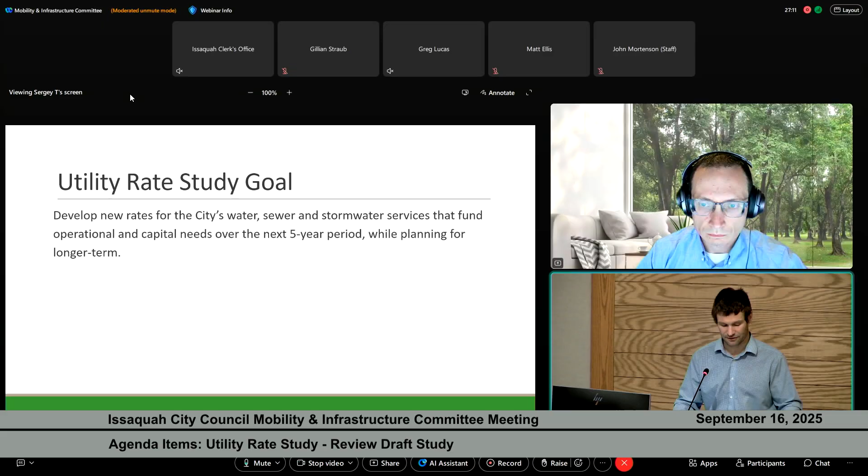Next slide. As we look at bringing the entire study to the full council, we want to reiterate the core objectives that we set out for the rate study way back in March when we began this endeavor. Namely, we want our rates to be predictable, smooth, and uniform; establish a defensible basis for assigning cost shares and providing equity for ratepayers; cover the full cost of providing utility services now and in the future; provide sufficient operating reserves to protect the solvency of our funds; and afford the investment in capital infrastructure to ensure current and future customers pay their share of the system's costs.

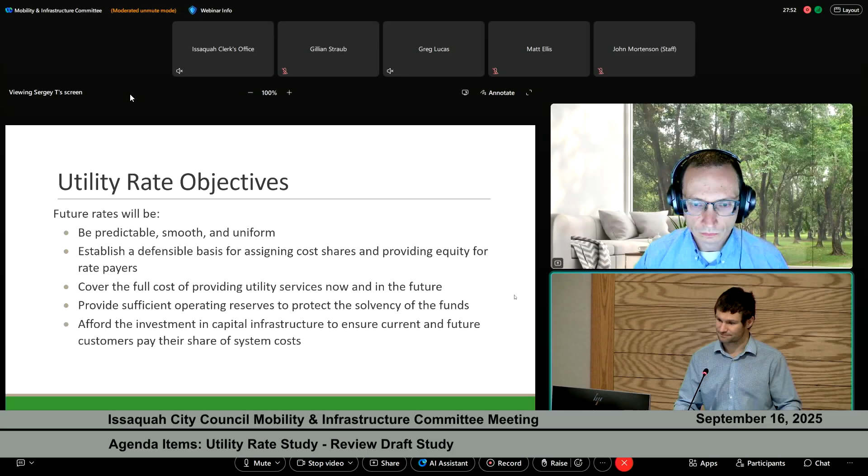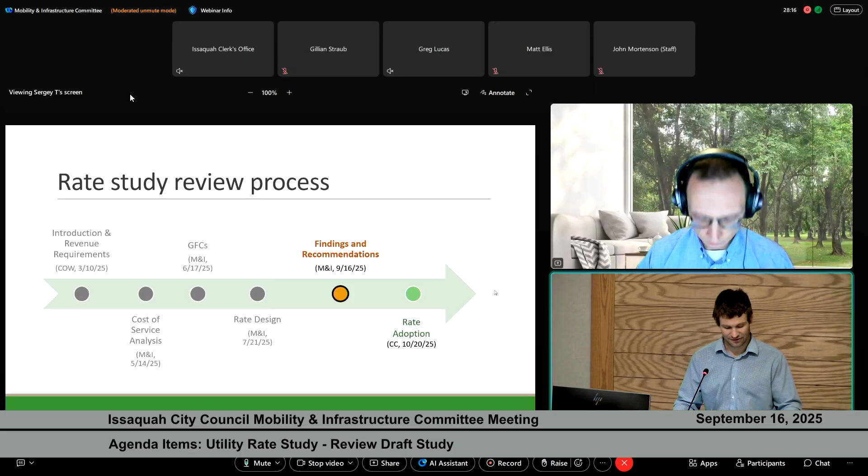Next slide. So here we are. We set our revenue requirements, our cost of service for each utility, identified general facility charges, and evaluated our rate design. Tonight we are going to provide a very brief summary of the policy discussions we made to date, as well as show the changes in utility rates from present to future, and ensure the committee is ready to send the entire package to council for rate adoption on October 20th. Next slide.

So, with that, our direction needed tonight is we'll be asking the committee if you are ready to forward the rate study to City Council for consideration and to recommend adoption. And with that, I'm going to pass it off to Sergey.

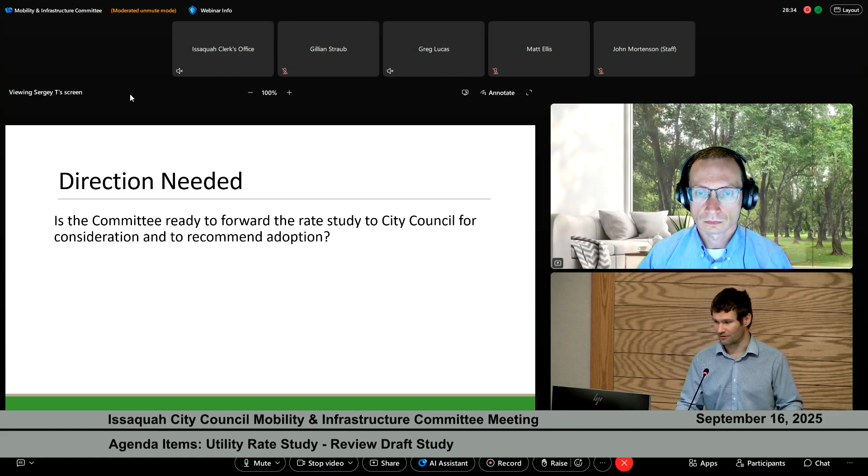Thank you, Matt, and thank you committee members for taking the time this afternoon to continue our discussion regarding the utility rate study for the water, sewer, and stormwater utilities. As Matt mentioned, my name is Sergey Tarasov with FCS. Now we'll do a quick overview of the presentation and dive right in. We're going to talk about the overall rate setting process. It's been a couple of months since we met, and I always like to reiterate just the steps that go into these types of analyses.

We'll talk about the background, just a quick refresher of our prior meetings, and dive into the summary of the prior discussions regarding policy and the guidance that we have received. We'll also briefly look at the results, but all the information that we'll be discussing today has been reviewed numerous times with the committee and staff internally, and is just being aggregated all together for your one additional review, just to make sure that you're comfortable with the guidance to move forward with the full council.

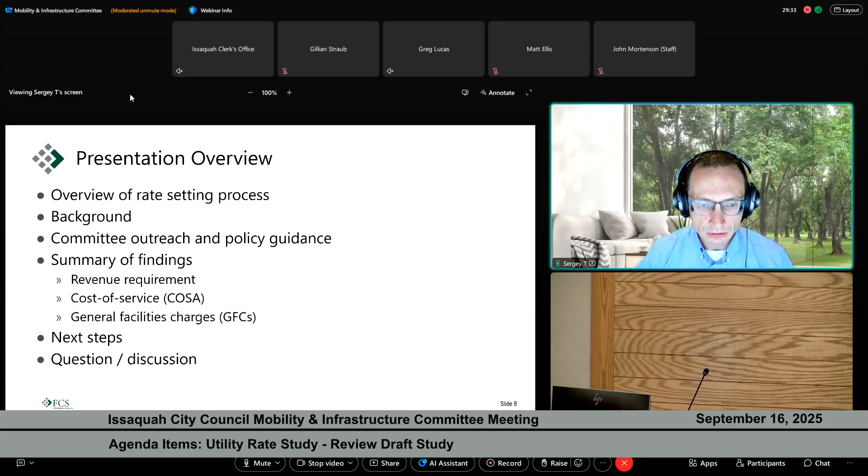So just as a reminder, a typical study such as this one consists of 3 key analytical steps, starting with the overall revenue requirement, which defines the needs for each utility on a standalone basis. Here we're taking a look at our expenses and revenues at current levels, making sure that we can meet our obligations, and if not, what do we need to do about it, making sure that each utility is self-sufficient, with no cross-utility subsidization occurring.

Step number 2 is referred to as cost of service, and dives a little bit deeper, looking at inter-class cost allocation, trying to answer the question if there are differences between classes. So if you think of step 1 as identifying the size of the cost, the size of the pie of cost that we need to cover, step 2 slices that pie into pieces to look at how big the slice should be for each class.

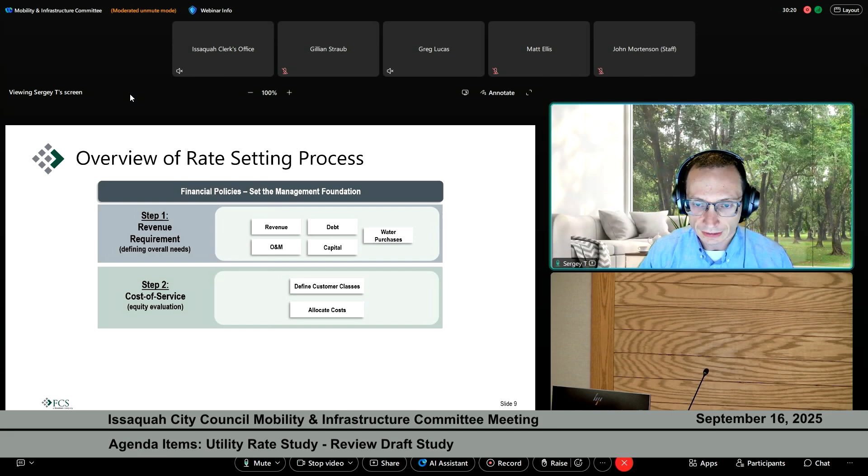And lastly, step number 3, rate design, looks at developing the actual fixed and variable charges that are assessed to our classes and our customers individually.

Now, as a quick background, the last study completed for the utilities, for the city's utilities, was in 2020. At that time, revenues were not sufficient to keep up with obligations, and the study developed a multi-year rate strategy for each utility, which is summarized in the table in the middle of the graphic. The highlighted green years are the years that have been adopted and implemented, and the study also forecasted beyond that 4-year period to see if there will be a need for additional adjustments.

Before implementing any extra rates, 2026 and beyond, the city wanted to revisit it, and that's why we're here this year discussing that updated rate study, which started in 2024.

Now, since we started the study, we've been working with your staff, going over the details, developing the analysis, and started the outreach and communication process with the committee of the whole earlier this year in March, and then continued our discussion with the Mobility and Infrastructure Committee, meeting to follow up on revenue requirements, talking about cost of service, discussing the one-time fees imposed on new development or redevelopment through general facility charges, and then our last discussion was in July to talk about rate design.

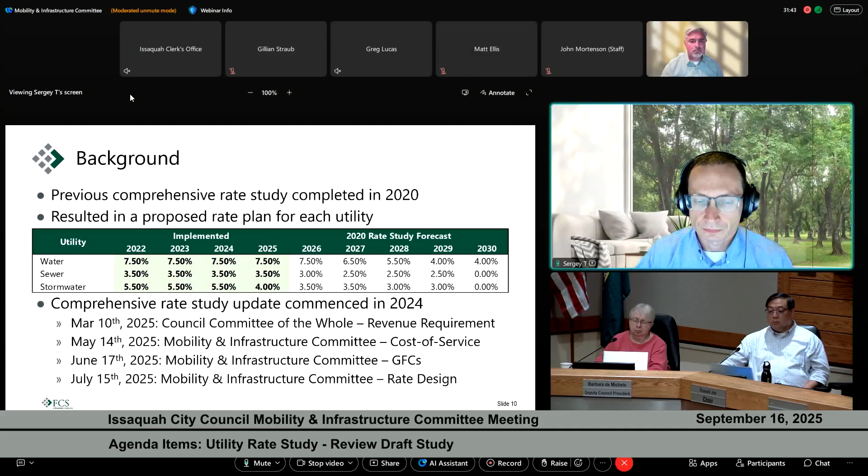Now, the major policy guidance that we were looking for from the committee, and received from the committee, will be summarized in the next couple of slides, and we'll again break it down by the steps of the rate study.

Starting with the revenue requirement, again, we did confirm that the projections from the prior study were present. Rates at current levels in 2025 dollars were not sufficient to keep up with the inflationary cost pressures on operating costs, as well as the capital plans identified in the planning process through water system planning and general sewer planning.

In order to resolve those deficiencies, we came up with multiple approaches, and we looked for guidance from the committee, focusing on the way that we're financing our capital plan. So the first major question and guidance we received was, how do we pay for our capital? Do we utilize cash-only financing? Do we maximize debt financing? Or look at a hybrid approach?

Based on a bit of discussion that we had with the committee of the whole and the follow-up discussion, the direction we received was that we should try to minimize debt, especially in the short term, as much as possible. But if we have to utilize some debt in the longer term to keep our rates as affordable as possible, that was sufficient as well. So our main guidance was to keep the debt borrowing to a minimum if possible.

The second question that we had for council was regarding multi-year rate setting. The rate strategy that we'll be discussing and the rate plan will be a 5-year rate plan. The capital needs that the utilities are facing, developed through the comprehensive planning efforts, do go beyond that 5-year strategy. So the big question was, do we set our rates for just our short-term needs, or do we make sure that we can cover our obligations not just today but into the future?

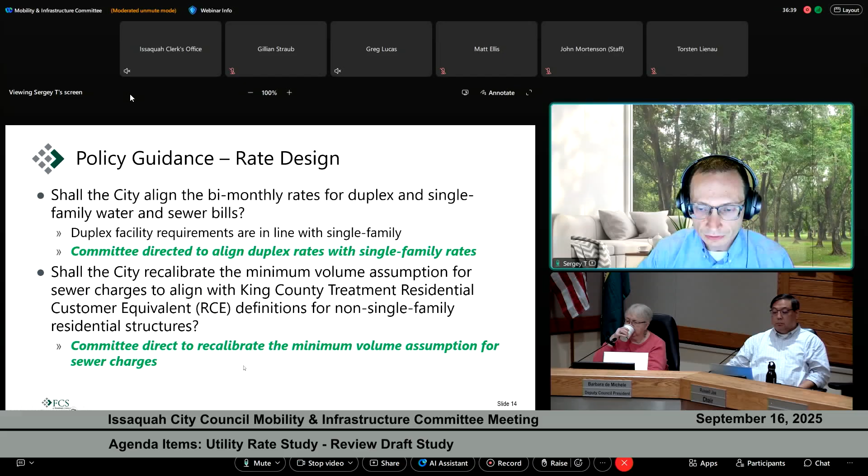So we proposed recalibrating to tie the minimum charges to align with their definition of an RCE. Again, the committee was comfortable with that recommendation.

Then the last policy guidance we talked about was focused around a slightly different concept. Previously, we were talking about bi-monthly rates, which are ongoing to existing customers. Then we switched gears and talked about general facility charges, which are one-time fees imposed on development for connecting to the city's utilities. When we calculated the charges to cost-based levels, the question for the committee was: do we set the rates at the calculated levels? Do we defer any adjustments at this time and revisit in the future, keeping rates at current levels, which would put pressure onto existing customers for the recovery of those project costs?

Do we phase in gradually towards cost-based levels over multiple years? And then lastly, historically the city has had a practice of adjusting these fees between these interim updates with inflation, because these charges are typically calculated in today's dollars, and as the cost of infrastructure increases, you're allowed to adjust the fees to account for that inflation.

So the direction we received from the committee based on these charges was to set the sewer and storm charges to the cost-based levels, and gradually phase in the water adjustments over time, since they were a bit higher than the other utilities from an increase perspective. Regarding the annual inflation, the committee was comfortable keeping the current practice of adjusting for inflation annually.

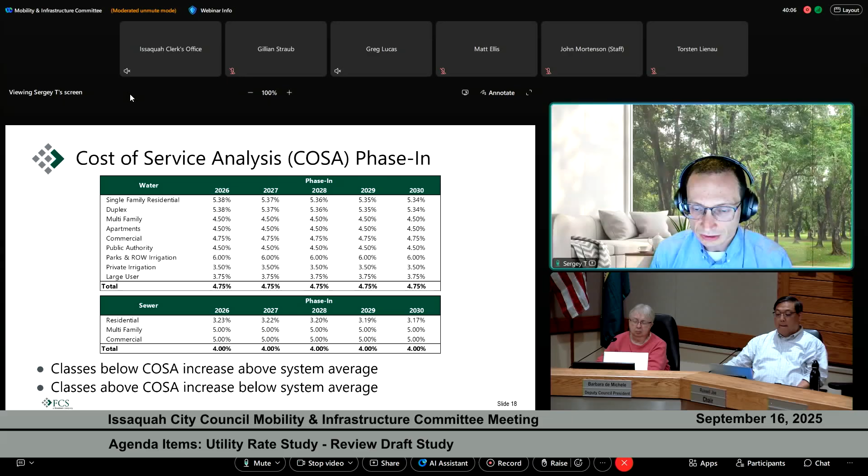Next, we'll take a look at the last step, the rate design, the actual proposed rate schedules. Again, not focusing too much on the numbers, because there's quite a few. I do apologize for that. This is the rate proposed schedule for the single family and the duplex rate schedules.

The main thing to notice here is that currently the single family and duplex rates are slightly different, both on the fixed charges, represented in the upper table, and they have a slightly varying volumetric rate represented in the bottom table. The blocks are slightly different, and the rates within those blocks are different. All we're trying to propose is to move the duplex into the single family structure, with this change starting in 2026.

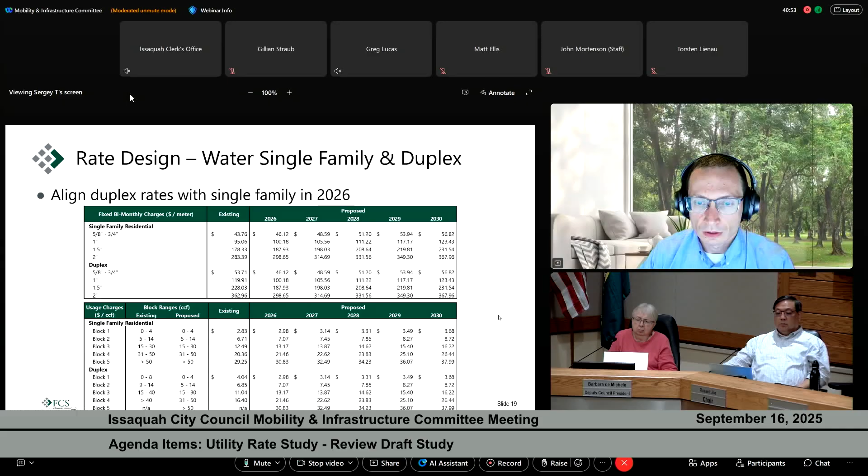Moving on to non-residential classes, here we currently have the same fixed charge for all non-single family type of accounts, which includes apartments, commercial classes, public authority, and large user accounts. We're keeping that concept the same. Everybody will still maintain the same fixed charge on a bi-monthly basis.

The volumetric rates will be slightly adjusted differently to align with the cost of service phase-in that we talked about a couple of slides ago. Overall, not a significant change from a system-wide adjustment, just keeping the same rates for the fixed portion and slight moderate adjustments to each individual subclass of the non-residential categories.

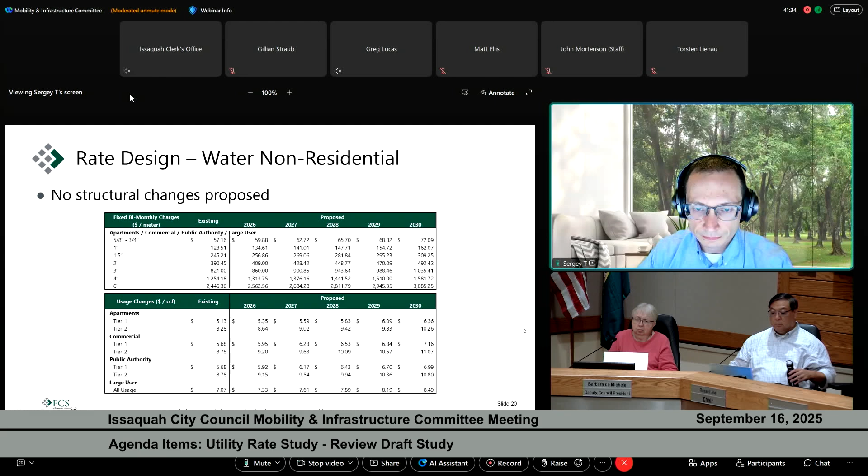For the irrigation classes, here we're summarizing both parks and right-of-way irrigation as well as private irrigation. Again, similar concept here. The bi-monthly fixed charges will remain the same for both, and the volumetric rates will start to converge gradually over many years. So this is a very gradual transition, moving the classes towards a similar rate as identified in the cost of service analysis.

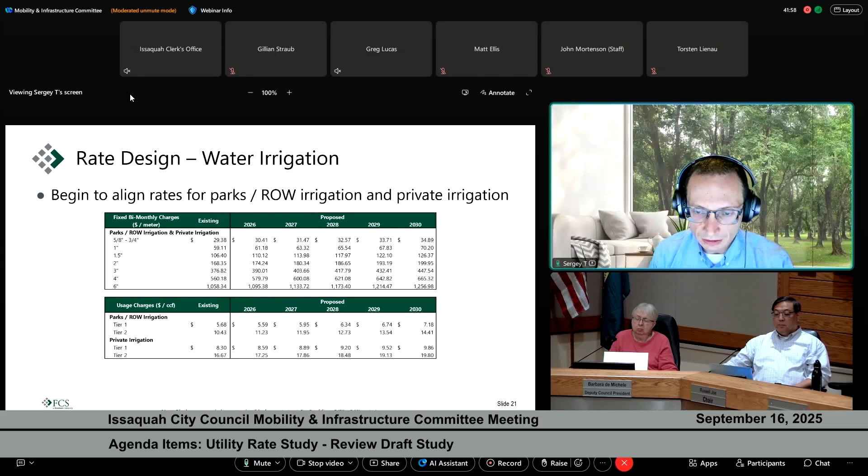Moving on to the sewer utility, here we're summarizing the local share, the city share of charges. We currently have a fixed charge that's the same no matter what class of service we have, and a volumetric charge which is also the same no matter what class we have. Based on the cost of service results, there needs to be a differential between classes.

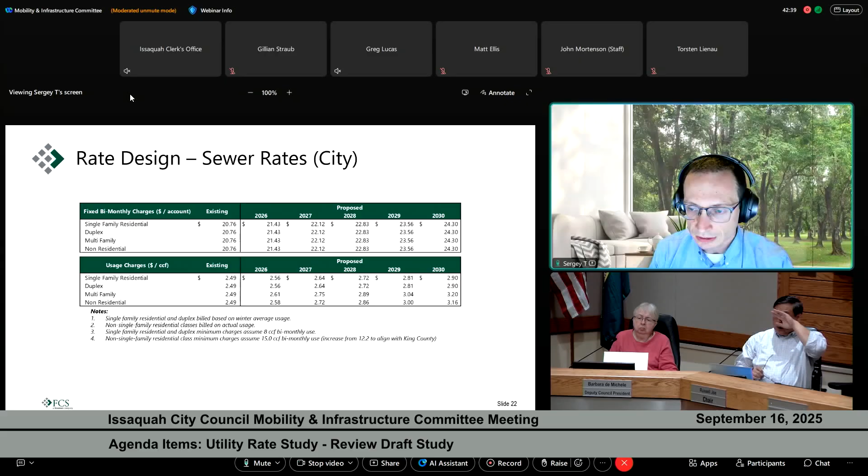Now we're keeping the fixed charge the same for all classes, but the differential is starting to materialize through the volumetric rate. So you'll notice the single family and duplex rates will stay together because we're merging those classes into one, and the multifamily and non-residential classes will start to deviate in 2026 and beyond, trying to align and address the cost of service findings.

Looking at the combined rate for the city and the King County portions of the sewer rate, the upper table shows us the fixed charges. You will notice that the single family rate consists of both the local share and the fixed charge for the King County treatment portion, because it is assessed by King County to us on a fixed charge basis.

So you can see that it's represented as a much higher rate than only the local share for all other classes. Starting in '26, you'll notice duplex will align exactly to the single family rate, while the multifamily and non-residential will still continue to only have that local share.

For the volumetric rate, the single family rate only has the local share, while the duplex and non-single family have a built-in volumetric King County portion as well. That concept again goes to merging duplex with single family starting in '26, and then keeping that same concept for the volumetric rates starting in '26 and thereafter.

You will notice the minimum charges that are assessed to our non-single family customers will go up slightly. That is because we are rebalancing that minimum fee to align with the King County definition of RCE. So instead of being about 12.2, which it currently is, we are moving to the RCE definition for the minimum bill of 1,500 cubic feet or 15 CCF bi-monthly.

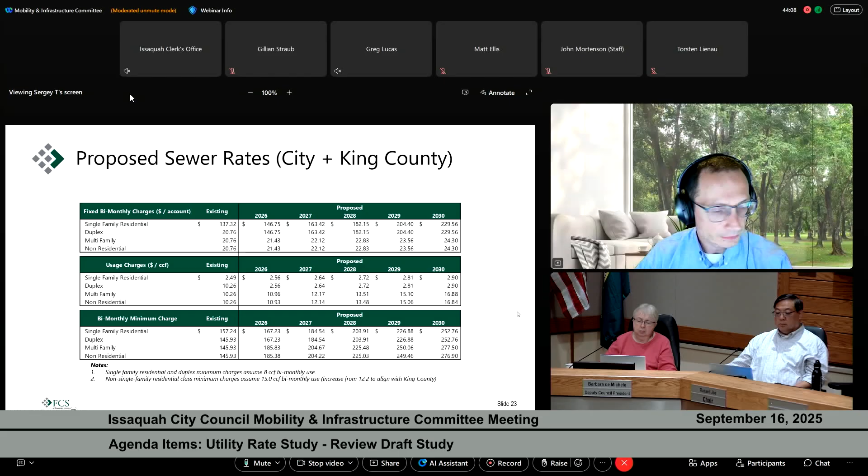Then lastly, we have our stormwater rates. These are assessed on an equivalent service unit basis. There is a lower rate for undeveloped parcels, but everybody's treated equally. It's just a charge per ESU, so there's no structural changes recommended. The increases are simply applied across the board to the per ESU rate.

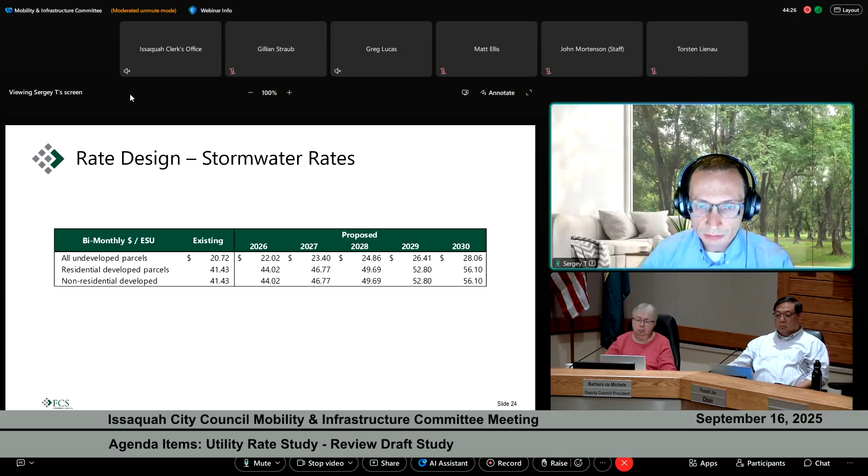Now, I always caution that this is a little bit of an apples and oranges comparison because we're comparing our rates today to the proposed rates for tomorrow with everybody's rates today. And we know for a fact that many of these communities are going through similar type of studies and will have similar types of adjustments proposed for their 2026 year as well. In addition, every system's different, every system's topography is different, demographics are different, so it's just not a perfect apples and apples comparison, but that question does get asked.

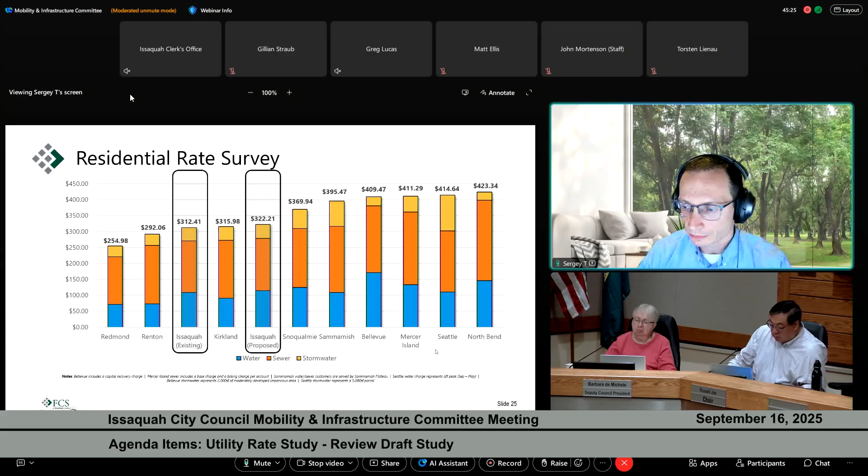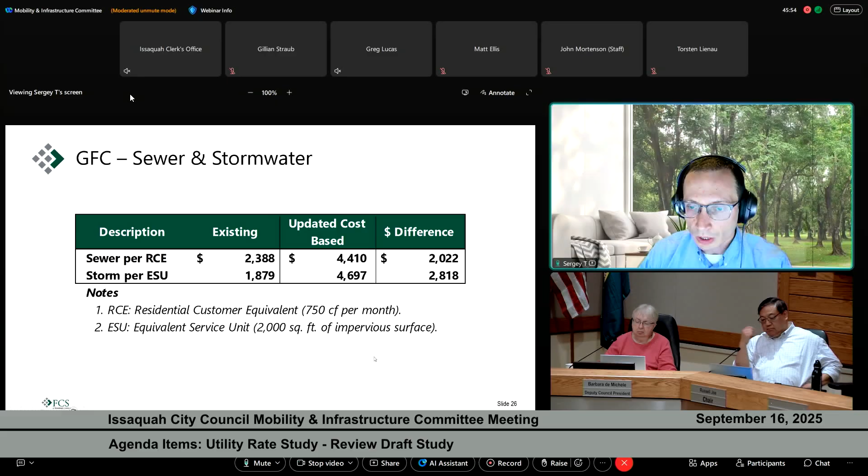In addition to the charges that you're seeing here, inflation will be adjusted based on an accredited construction cost inflation index, which typically is referenced as the engineering news record construction cost inflation index. Since we don't know what the inflation will be and it has to be tied to actual inflation, the adjustments will have to occur once the indices are published on an annual basis.

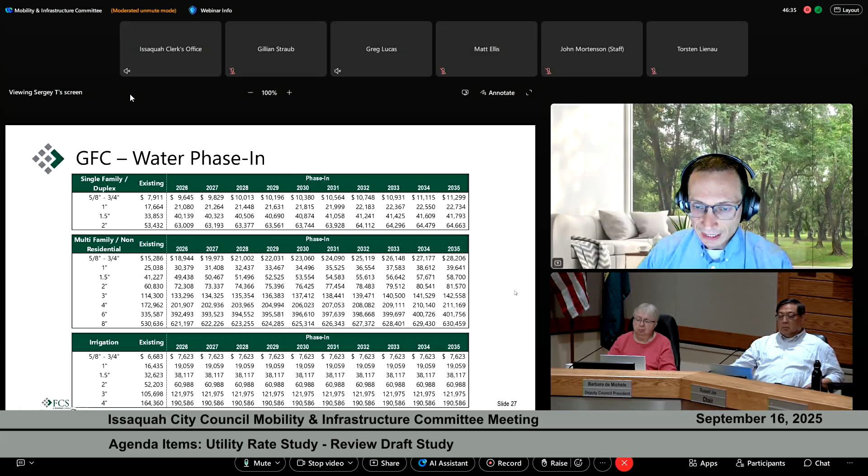So with that brings to the end my portion of the presentation, and I'll hand it back over to Matt.

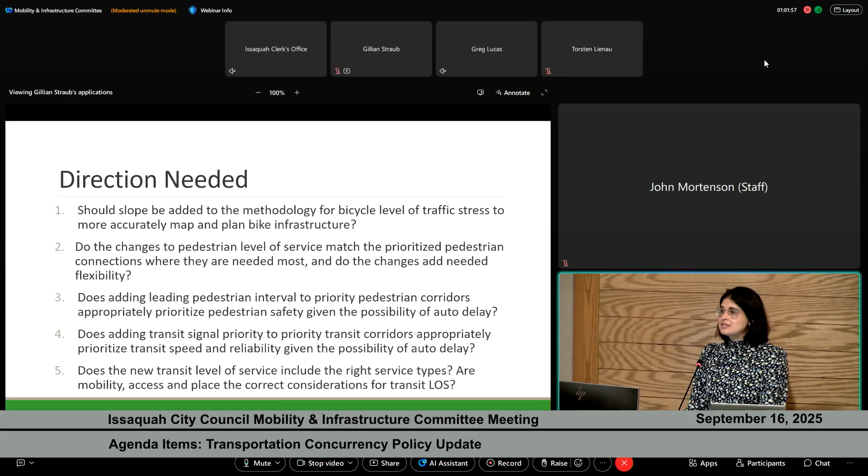Our recommendation — we'll go through exactly what that is for each of these — is that you support these changes and recommend them for adoption by the City Council in November. This is because they enhance our ability to build stronger, safer, and more reliable multimodal connections throughout the city.

We brought these items to the Transportation Advisory Board 4 times over the last year. Their fingerprints are all over this work, and they've really enhanced what we're proposing to you tonight. They supported these changes, both the large policy changes and how they're incorporated in our transportation element and mobility action plan. We brought these same items to PPC, and they were also supportive, but we can get into more nuance of that feedback as needed when we talk about each item.

You've probably heard about concurrency not just as it relates to this project, so we wanted to give you a sense of other touch points with the concurrency process you've had, and some next steps for this larger body of work.

In 2023, we conducted a concurrency model update that assesses demand at different intersections for different modes, but largely assesses vehicular demand, both now and into the future. We're supposed to do that every 3 to 5 years by code, so you'll see it on our next steps list to pursue an update to that model in the next 3 or so years.

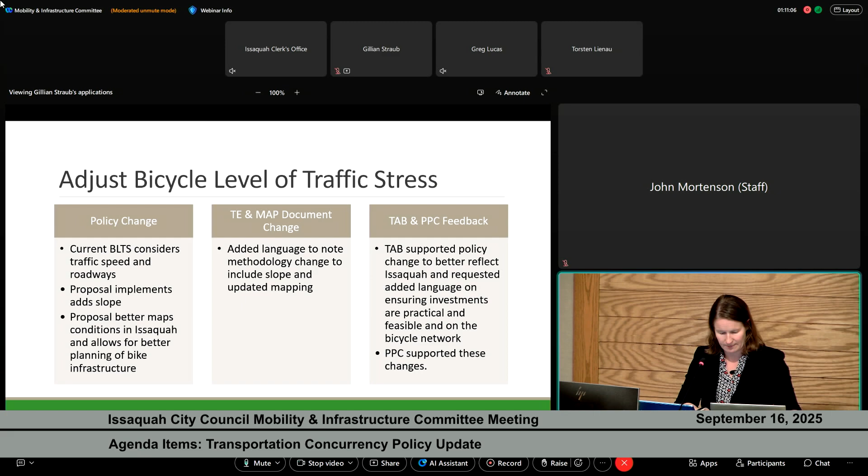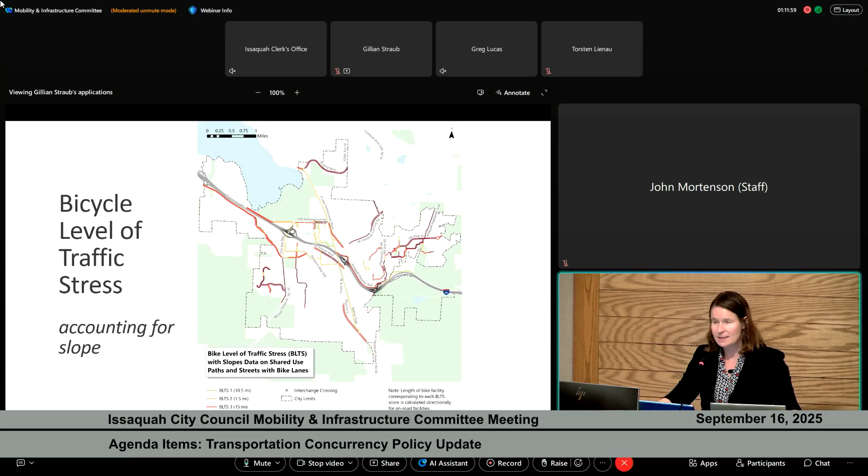I would note that there are many low-speed, low-volume residential streets throughout the city. Those are an important, kind of informal component of our bike network, but this updated analysis might help us to think a little differently about our bike network moving forward.

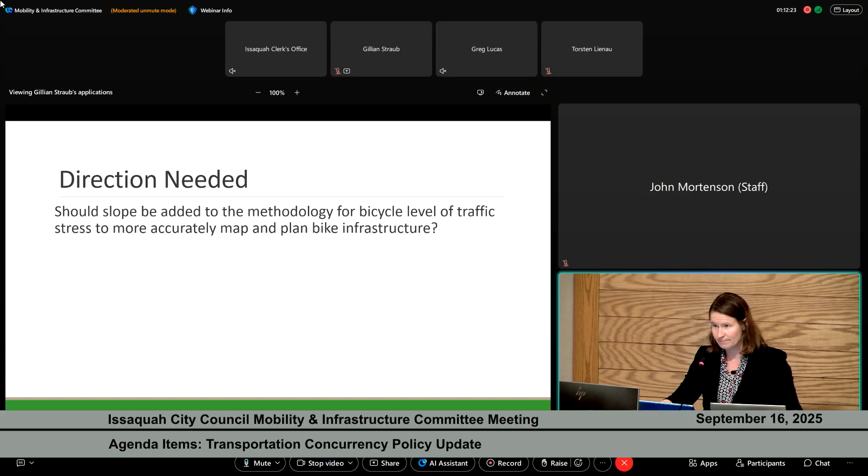So the direction we are looking for tonight from you is just to answer the question: should slope be added to the methodology for bicycle level of traffic stress to more accurately map and plan bicycle infrastructure? Do you have any questions about that?

I guess this is a new concept to us, so please forgive us if we're asking questions that are too basic. Does the bicycle level of traffic stress go into the calculation for the impact fees that developers potentially will pay? In other words, it's a measure of how good or stressful our roads are for bicyclists. It's a new measure that I think captures things, but how will it be used? Is it used to improve our infrastructure, or just to measure the stress of our infrastructure to bicyclists? That's an excellent question.

So it doesn't directly factor into an impact fee calculation. We're not going to be asking developers to look at the level of stress on a given bike facility. That's a pretty technical calculation, and that's why the city is doing that measurement up front.

What this is going to help the city do is update your capital list. That's one of the key components moving towards updating your impact fee program. First, you've got to get all the projects right. This analysis is intended to help you better plan your bike infrastructure and figure out which facilities are really worth the investment, and which ones might be too steep, where we need to think about something else. Once you have that capital list defined in your plans, you can go about updating your impact fee program. There's been a movement statewide toward more multimodal programs, and a recommendation I've discussed with your staff is updating that program to incorporate some of those key facilities. That's more and more prevalent all over the state today.

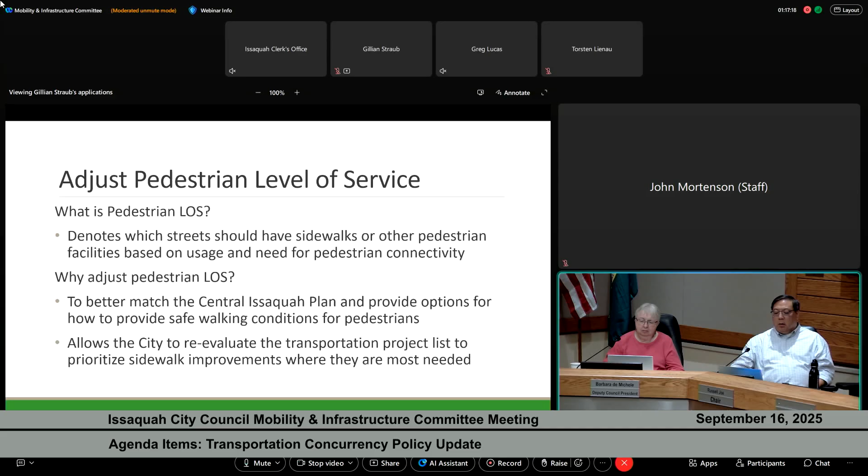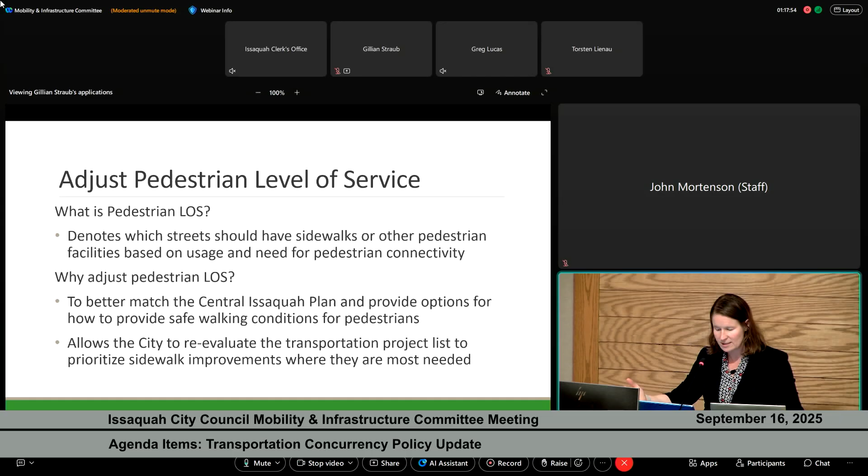Thank you, go ahead and keep going. Wonderful, thank you. So the next mode I'm going to talk about is pedestrian level of service. First, to describe the recommended adjustments to the city's pedestrian level of service standard: this policy helps guide which streets should have sidewalks based on expected usage, pedestrian activity, and connectivity. The recommended adjustments provide a better match to the central Issaquah plan and additional options for how to provide safe walking conditions. These updates will help the city reevaluate the project list to prioritize sidewalk improvements where they're needed most.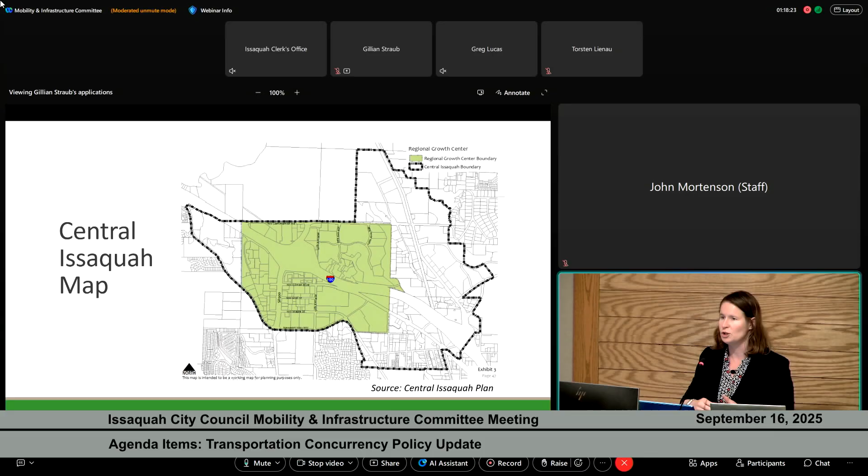We're recognizing that really all of central Issaquah should be in that equation. So that's one of the major changes in this new policy.

So when we look at what's being recommended here, there are big changes to expand Tier 1 requirements. Again, those are where you've got high amenity sidewalks on both sides of the street, on arterials and collectors throughout central Issaquah, not just limited to the Regional Growth Center.

It also provides some additional flexibility in how we think about accommodating pedestrians on residential roadways. Before, we said you've got to have speed limits of 20 miles or less, but the city engineer really called it out and TAB agreed: if there's a sidewalk on at least one side of the street, that should count too for meeting that standard.

So again, providing some additional flexibility and refinements to the policy we're looking at here. The proposal is really to add these wording changes to policy D1 to reflect that.

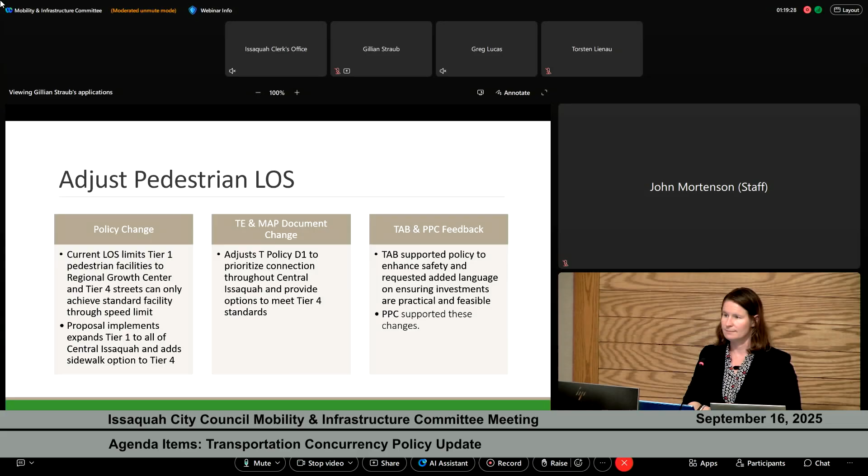Question: I'm a little inexperienced on this, but just to get the direction here, do the changes to the pedestrian level of service match the prioritized pedestrian connections where they're needed most, and do you agree with the changes to add needed flexibility?

Do you have any questions on this section? Okay.

In my discussions with citizens in town, they see all the growth and new construction going on, and they ask me what the city is doing to improve their mobility within the city. We touched on bikes a little bit with the measure you presented to us. How does this help our pedestrians get around more safely and more easily in town when I get asked that question?

I'll start with answering it, and I know John Mortenson is on and I'm sure he's excited to contribute. My quick response: the level of service policies can seem a little abstract, but where the rubber really hits the road is in helping refine your project list. This does a better job of reflecting that we need to provide higher pedestrian amenity throughout central Issaquah, where we're seeing a lot of the growth. So it's adding it to requirements, to your frontage requirements when a developer comes in. And eventually, when we get to impact fees, this helps these projects be part of that list. I see John Mortenson has lit up his camera, if you'd like to give some comment.

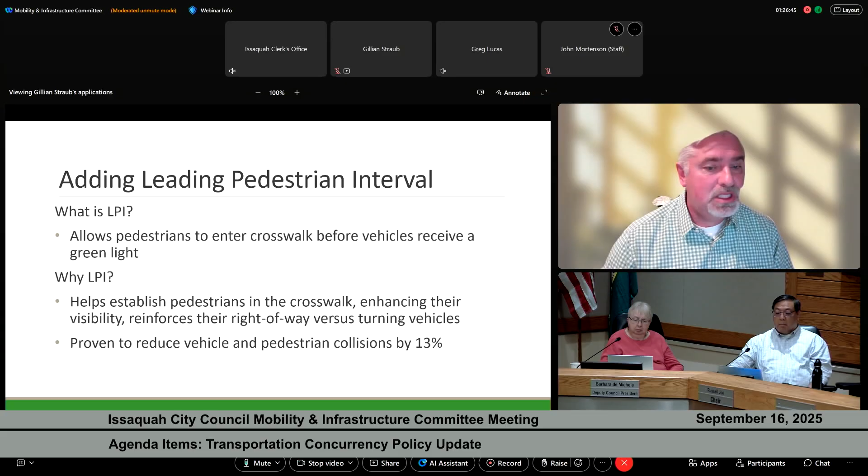Is someone able to advance to the next slide? Great.

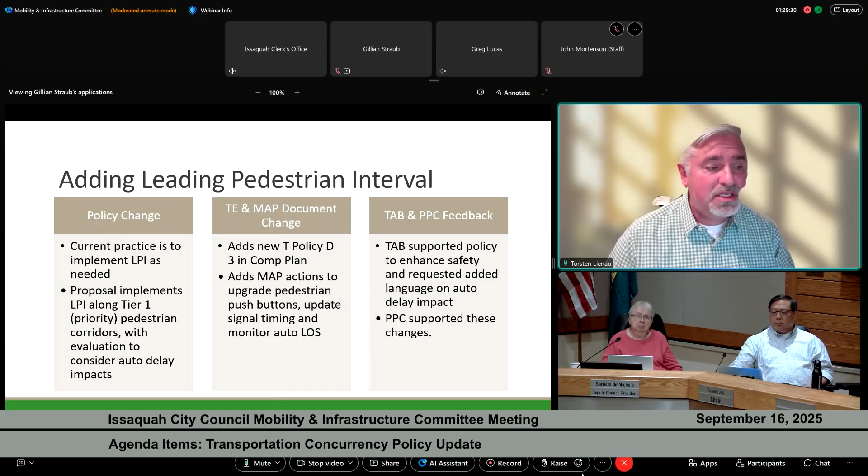Staff is recommending implementing LPI along all Tier 1 pedestrian corridors, while also monitoring and evaluating vehicular delay as it's implemented to ensure the city maintains its level of service standards. This entails a change to a MAP policy and a comprehensive plan policy, with actions to upgrade pedestrian push buttons at all intersections where this is implemented, update signal timing, and continue to monitor automobile level of service at those intersections. Both TAB and PPC supported this recommendation. If we could go to the next slide, we are asking for your direction tonight.

We are asking for your direction tonight: does adding LPI to priority pedestrian corridors appropriately prioritize pedestrian safety with the possibility of some additional auto delay?

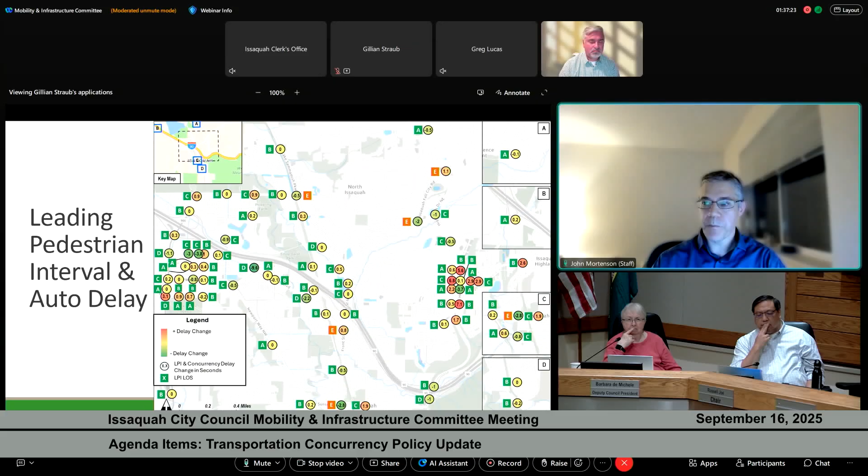And John, you said you've looked at pedestrian scramble at this particular intersection? Yeah, the city did a study back in 2018 that evaluated what would happen if that intersection was converted to a scramble, similar to what we have at the Three Trails crossing at Gilman, Juniper, and Rainier. It greatly increased the delay at that intersection and made it a lot worse for the automobile.

And that's generally the case, because if the intersection is already at capacity, you're creating a whole other phase at the intersection where no vehicles can move at all. Whereas with traditional pedestrian crossings, there are at least some vehicles moving that aren't in conflict with the pedestrians, and that helps with the delay. So it generally makes sense.

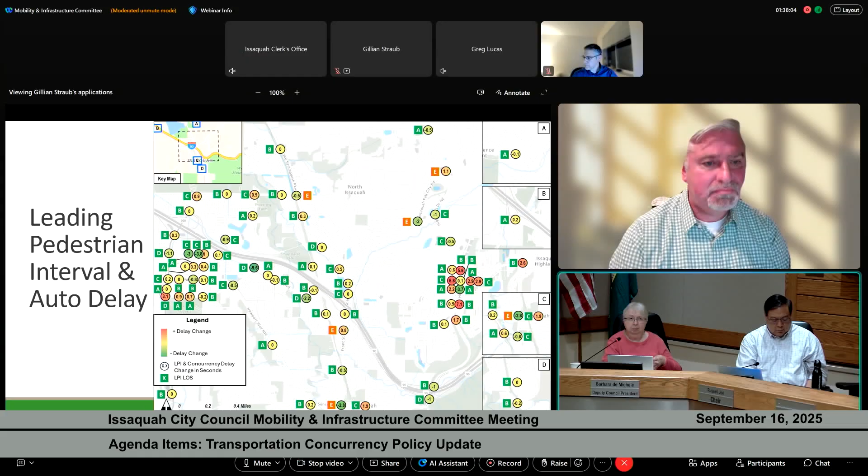Okay, thank you. All right, go ahead and keep on keeping on, so to speak.

So the next policy is transit signal priority. Essentially, transit signal priority senses a transit vehicle approaching an intersection, and without significant undue delay, the signal would potentially extend the green phase as the bus approaches so it can get through and clear the intersection. Or if a bus is approaching during a red light, the signal would sense the bus and might cut the other phases short and turn the phase to green, so the bus never ends up slowing down or stopping and continues through the intersection.

What it does, and why we would consider it, is it aids in the speed and reliability of transit, which are key factors in actually increasing ridership for transit. Thank you, for the next slide.

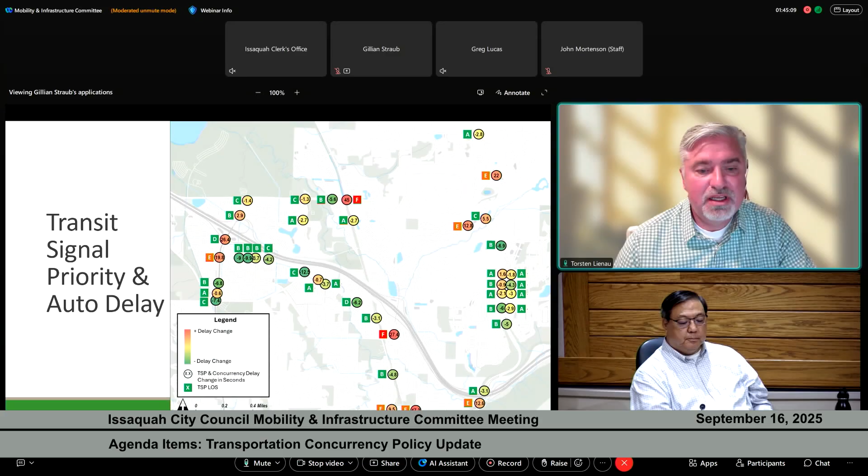You bet. Because we're looking at the other direction as well, so that average is considering TSP now operating in the northbound direction as well. And we did not assume queue jumps at Gilman and SR 900. That's the level of service E intersection.

So when you include queue jumps, generally that helps to mitigate the impacts of TSP. And since the road is already pretty wide there, and that would increase the pedestrian crossing distance as well, we did not look at queue jumps at that particular intersection or in the northbound direction at the I-90 ramps.

Okay, and I guess the next question would be directed to John a little bit. The road is already pretty wide with the separate southbound transit lane dedicated off of eastbound 90 to southbound 900, and then on the other side there's a dedicated carpool lane there. So if we were to implement a TSP, it seems that the road is already pretty wide. Could we take a look at that intersection a little bit more closely to see if including a queue jump with TSP might improve times a little bit, or degrade times a little bit less than what we're seeing here? Or John, you might have already done that, so I'll just throw it over to you.

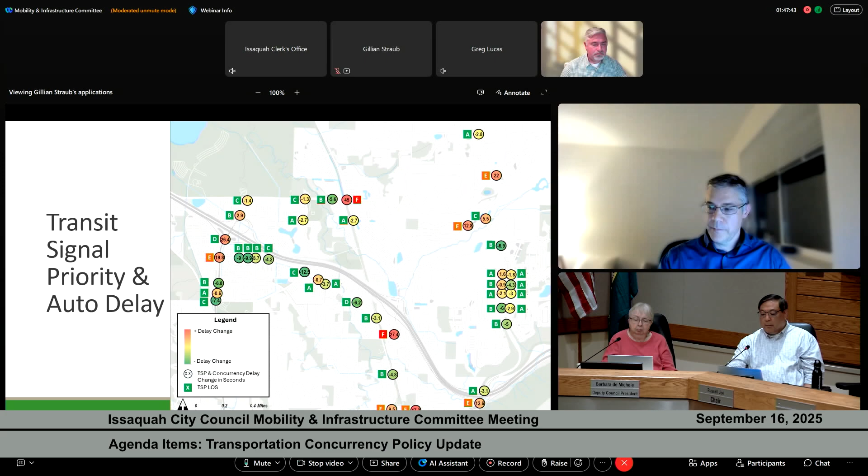Okay, appreciate that background. Thank you. Go ahead then with the presentation if there are no other questions from the committee.

I just wanted to interrupt briefly to point out two things. First, the possibility to add queue jump lanes is written into the mobility action plan as something we're going to look at to make sure we're considering auto delay, noting that as one of the tools. Second, I want to point out that TAB spent a lot of time talking with us about how we came up with this map and some of the assumptions that were made.

We were perhaps overly cautious in how much we anticipated auto delay on this map. I can't give you an exact recalibration to say those intersections we were looking at are actually probably level of service D rather than E. But when we talked through all the different factors that we had included, there was a sense from TAB that we were overly cautious and overly anticipated the possibility of auto delay.

But like Torsten and John have mentioned, we're going to take a look at those specific intersections where we could implement it to see when, in reality, what the impact might be. I just wanted to point that out before we moved on. No, it's helpful, thank you.

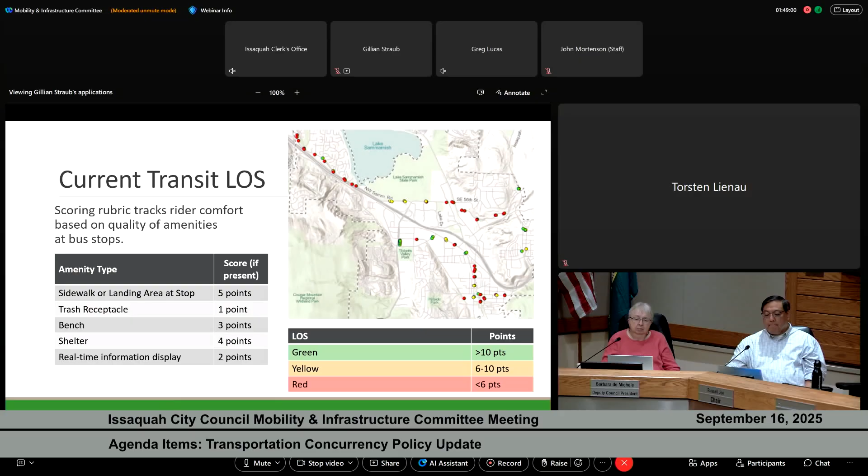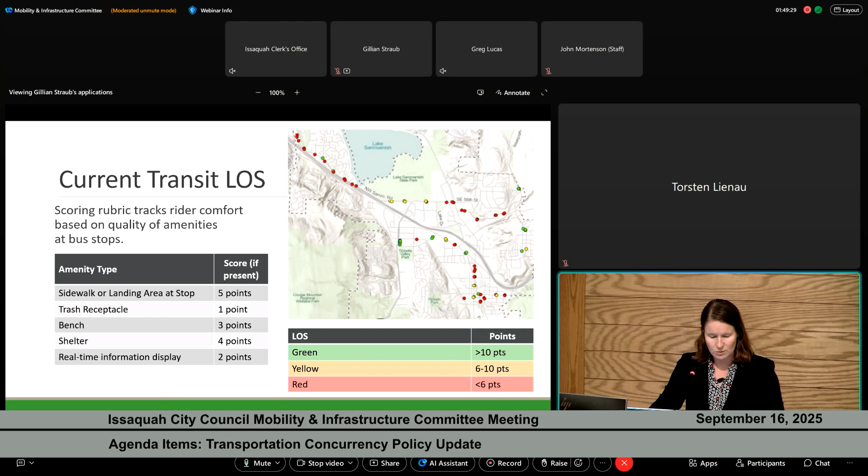Good evening again, I'm back for my final topic here tonight. We wanted to talk about proposed changes to your transit level of service policy. First, what's shown on the screen is what you have as a policy today, and I'd note that it speaks only to conditions at transit stops, scoring them based on the presence of amenities like shelters, real-time information, benches, trash receptacles, etc. The proposed changes to the policy would speak more comprehensively to overall transit conditions.

Recognizing that not all transit services are the same, we've developed policy guidance for three different transit types. First, frequent service, very frequent service showing up every 15 minutes or so during the peak hour. Issaquah doesn't currently have any of this service today, but the hope and expectation in the future is that you will, so we wanted to provide guidance for that. Regular service is every other type of fixed route service that's not quite as frequent, and then on-demand flexible services. So the policy speaks to three aspects: mobility, place, and access.

Mobility is actions the city can take to increase the speed and reliability of transit services. Place is similar to your current policy, which speaks to amenities at transit stops, but we've updated the guidance to reflect King County Metro guidance. Thirdly, access is intended to think about how people are actually accessing transit services. This policy would actually have significant overlap with the sidewalk standards, the bike level of service policy, and the crossing standards we've been talking about tonight.

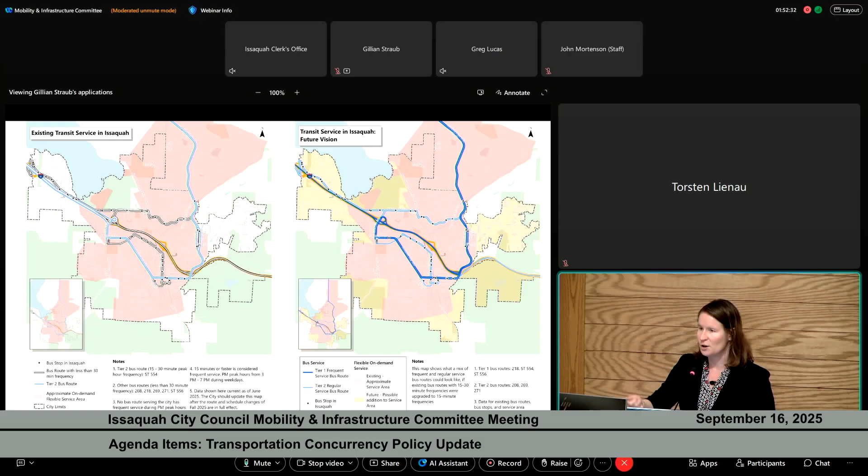You can see there is a future vision of very frequent service, and just some potential guidance for the city to advocate for increased flexible transit service. Again, this isn't a promise, but I'm a big believer that you'll never get it if you don't ask for it.

So this is just stating that policy desire from the city side, focusing on expanding your current level of service policy to speak to aspects of mobility, access, and place. It would result in updates to policy F5, as well as additional narrative in your transportation element and in your map. So essentially, we're here tonight just to ask if this new transit level of service guidance really hits on the right service types, and whether mobility, access, and place are the correct considerations for transit level service.

Okay, thank you. Do you have any questions, Deputy President? Hey, Michelle, so when I read this, and I think about the way that we interact with Metro, is this really a tool that staff can use in our discussions with Metro, letting them know that the council has set this as the direction that we'd like to see?

I feel like we're really kind of at the... I know that it's difficult, for example, to get bus stops and amenities at bus stops. It takes a long time. You get in a long queue at Metro to get those services brought to you. So generally, is this more of a direction so that staff has the backing of the council when they're discussing with Metro? Is that the purpose of this?

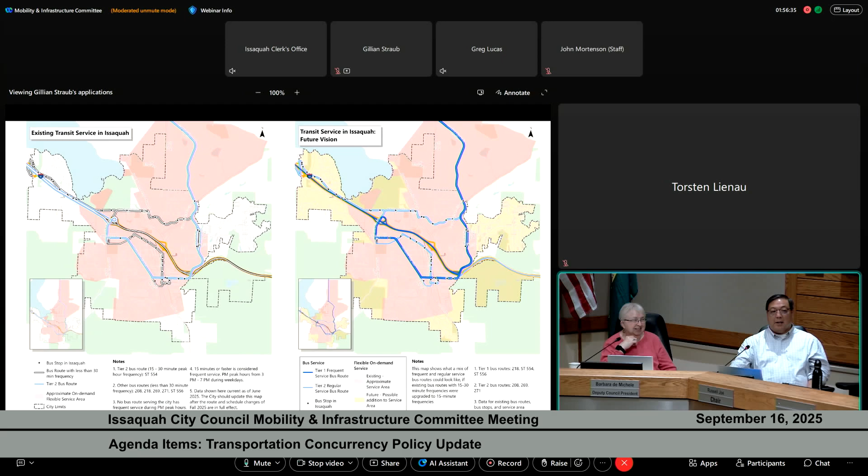So if I were looking at the material here, and tell me if I'm thinking about this correctly, it seems to me that breaking the categories down more accurately reflects what a user of the system is going to experience, and the things that the city can think about to help their user experience, and make it more likely that they're going to use transit in their daily lives if we can get some of these elements put in over time. Is that one way to look at it? That's perfectly stated, yes. Okay, say that for the record again. No, I'm just kidding. Thank you very much. Absolutely, appreciate that. I don't have any other questions.

Do you? Okay, just, you know, I know that cleanliness is a big thing when it comes to bus stops, and I think TAB's trying to get at that with the inclusion of trash cans and things like that. But did TAB have any discussion? One of the worst things you can have is a bus stop that is trashy, and people just do not want to be there. That came up. Thomas, do you want to speak to that?

That was a big piece of the conversation. I'm going to move aside and let you speak to that. And I should add that Metro, I believe, is upping its cleanliness standards, so I understand that they recognize the issue as well.

For the record, I'm Thomas Valdez, Senior Transportation Planner. So TAB mentioned this a lot.

We had many discussions on the issues of safety, cleanliness, and security. So we've incorporated language into the mobility action plan and the transportation element that directly refers to the operational nature of just maintaining bus stops. In recent months and over the past year, there's been many discussions on this from Metro. They actually have a cleanliness system, rated level 4 through 1. They're implementing power washing at every bus stop, really trying to make sure everything's cleaned up. They acknowledge that if the bus stop is not clean, folks aren't going to want to use it, and they have a regular maintenance schedule they're implementing across all bus stops across the system.

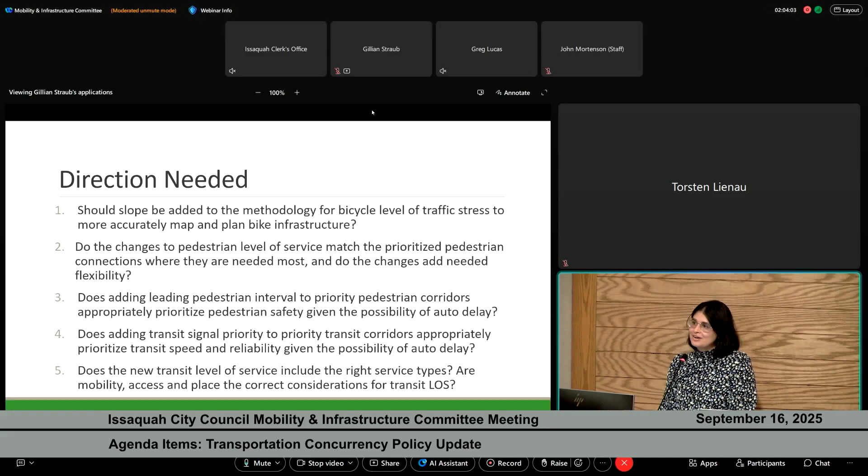So with that, here are the questions we'd like your feedback on. If you have no other questions, we'll open it up for public comment on the topic.

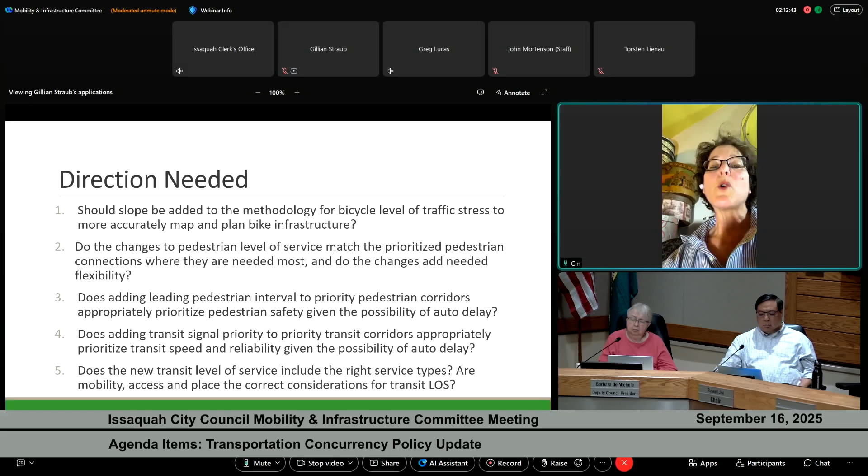When you look at traffic level of service failure, of course, our traffic fails when something happens in one of our corridors. If there's a wreck on SR 900, if there's something that happens on Issaquah Hobart Road, or one of those little tendrilly streets that we use in our system, then the whole system breaks down. And so Front and Sunset, going to a level F is an every third day occurrence already. I don't know how much anymore that we can worry about being a level of service D. So I am touching the third rail. I'm saying, when are we going to reconsider the concept of level of service D for traffic as something that we need to sustain when every third day we don't?

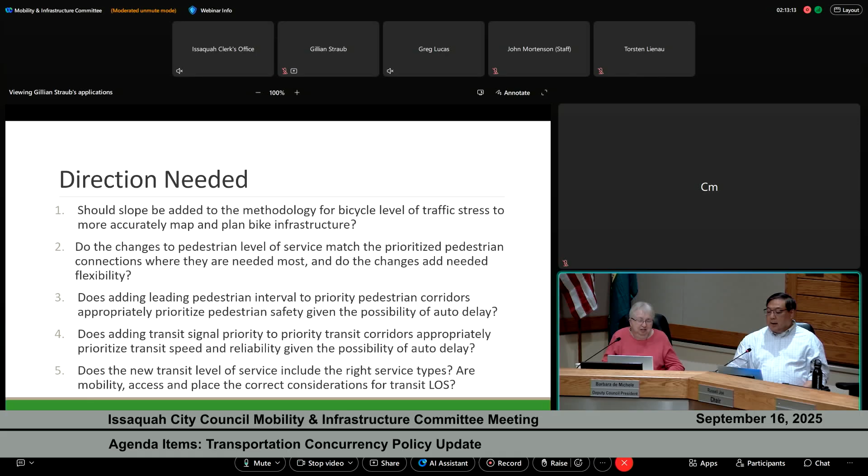Anyway, okay, thank you for letting me speak. I'm glad I finally got on. Thank you very much. Thank you, Connie Marsh, for your comments. Appreciate that. And you got in under the wire, as usual.

Nice. Thank you. Anyone else online that might want to provide public comment tonight? I see no other virtual hands. Okay, and I don't see anyone in the room that has indicated a desire to come up and speak to the committee. So we will go to the discussion portion.

All right, we have 5 questions in front of you. Happy to address them however you'd like. And they each relate to one of the 5 policy changes we've discussed tonight. Do you have a preference?

I think I can give my input fairly quickly. Yeah, I think these are the right things to send forward to the council. I'll just do a little shout out on the transit signal priority. I think that is a really good tool to add to our toolbox, and it may not work at every intersection, but it'll be there for those where it would work. And as we grow and change, maybe in the future it will be a more usable tool, but at least it will be there for staff to have access to that.

So everything here seems right. I would suggest that we pass this forward to the council. I'm looking at Andrea. Maybe we put this on the consent agenda. Depends on whether you want to tee up a greater discussion later on, but personally I think that these have been very well thought out. We have the approval of TAB and the PPC, and I think they all appear to be, to me, very reasonable.

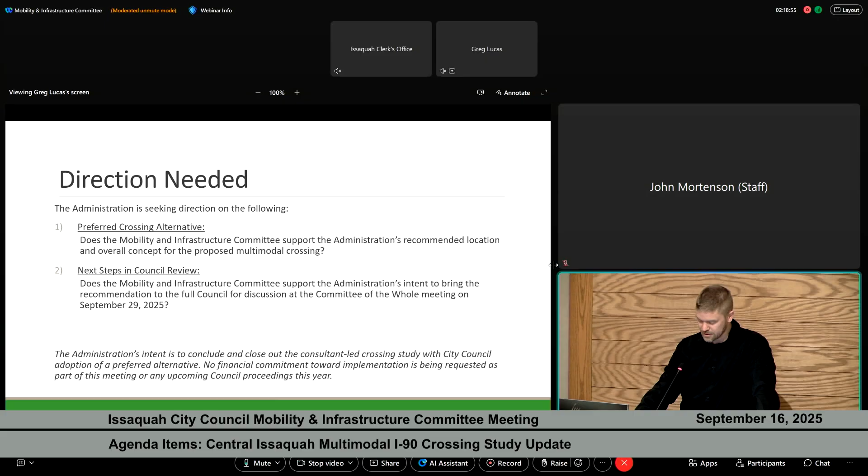Just a note here, the administration is not seeking funding approval or authorization to proceed with project implementation at this time. Rather, this step is intended to formally conclude the consultant-led study by identifying the preferred alternative consistent with the intent of the study.

The project's been on the Transportation Improvement Program for some time, previously identified as the 11th and 12th crossing, as identified in the adopted Central Issaquah plan and referenced in the environmental impact statement as a traffic mitigation measure. That means the project is recognized as a key measure to address increased demand on the infrastructure from higher density development in Central Issaquah.

And if this project is not implemented, level of service may fall below the city's adopted standards as traffic increases. I had a question about the EIS, if you know the answer. If we need to get some additional information back to the committee, that'd be awesome too. The EIS was included in the Central Issaquah plan. Would there be circumstances, because this is a project that might impact wetlands or stream buffers and other sensitive areas, that a new EIS might be necessary, and under what conditions or kind of circumstances might that occur? I know that's kind of a complicated answer, so if you have a short answer, fantastic. If not, leave it to the administration and Director Moon to give any kind of email note on that. But it was just a question that came to mind as I was looking at the materials.

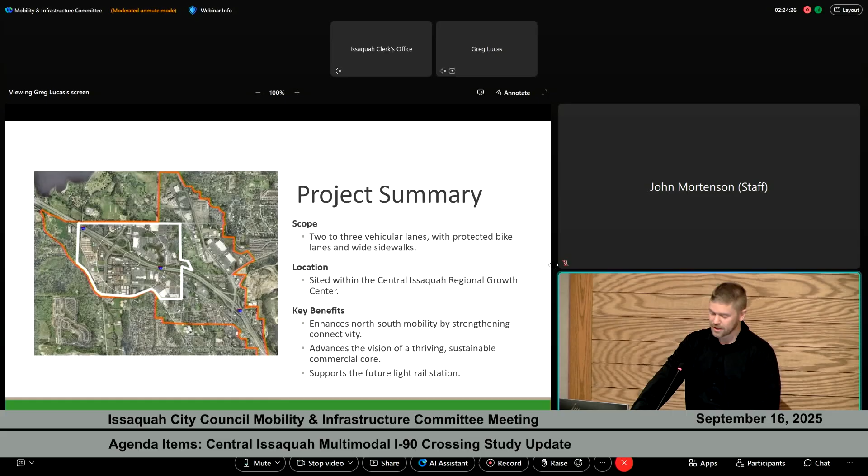This study started with a wide open call for crossing options. No option was off the table. We then looked at all the known core constraints of the project, including site conditions such as high water tables, soft soils, existing and upcoming culverts, and fish passage culverts. The grades and the valley floor make crossing more challenging since I-90, Gilman, and Pickering are all at similar elevations.

We also screened to minimize impacts on today's existing private and public improvements, and were mindful of future developments, trying to reduce any uneconomic remnants. We're also limited by connection points, especially on the north side of I-90. And we wanted to make sure the project wasn't just a boring utilitarian route that was an eyesore — we wanted it to feel like part of the vision of Central Issaquah.

That initial feasibility study yielded 5 concepts for consideration. After a deeper analysis, 3 were advanced to be evaluated using the project goals and evaluation criteria, and those are the 3 alternatives we'll explore today.

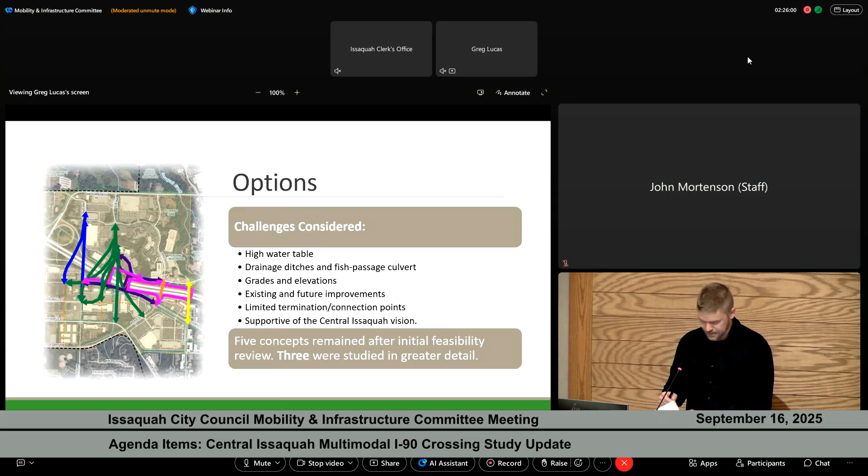In our overview, for each crossing location we'll cover the location, the overall concept, and key pros and cons. The first crossing is 12th Ave Northwest to 11th Ave Northwest. We'll move west to east, and the naming convention runs from the south side to the north side. 12th Ave is the intersection this ties into on the south side, and 11th is on the north. This crossing concept begins at the existing intersection of 12th Ave Northwest and Gilman Boulevard, then ties into 11th Ave near Lake Drive on the north side.

To accommodate the elevation difference across I-90, Gilman would need to be raised a couple feet on the south side, and the approach would taper westward to lengthen the runway to get the necessary elevation gain over I-90. After spanning the freeway, the structure dives back down to meet Lake Drive at the intersection with 11th. We tried to draw the alignment as best we could to reduce impacts to existing buildings.

One advantage of this alternative is the proximity to Sound Transit's representative project — the alignment approved in the voter package, which is relatively vague but mentions SR 900 as about the location where they think it will terminate. Sound Transit staff has shared that the project is unlikely to push much farther east due to the additional costs that would land on them, so we thought this was beneficial to be near the representative project.

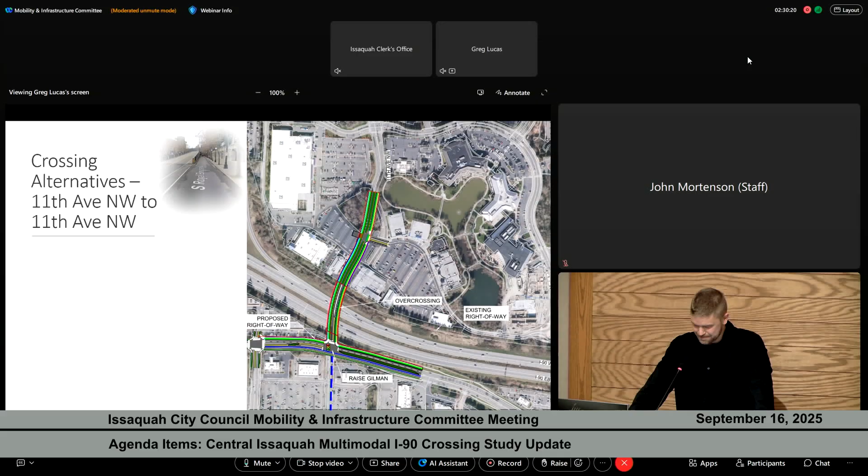What was that about Royal Brougham? I parked there on Friday at the little Royal Brougham parking lot. It's got a bypass lane—I think it's more of a turnaround there though, and it's also got the structure that kind of goes up and over. So if you could picture Royal Brougham, a similar concept would be needed on Gilman. Okay, so the easy slope would be something similar to what we might see here. But the corkscrew on the other side, we would not see. Okay, thank you very much. Yes, no corkscrew.

Much like the previous concept, this alignment stays close to the voter-approved representative project from Sound Transit, and it offers even greater flexibility for station and park and ride placement, thanks to more available acreage in this concept.

Also similar to the previous concept, the aerial configuration effectively mitigates the geotechnical risks of high groundwater and soft soils. A column in the freeway would mean we could shorten the span and likely reduce the girder dimension heights, basically reducing the amount we need to raise Gilman to make this feasible.

From a cost and delivery standpoint, it outperforms the other two crossings. It's got fewer curves, a shorter overall span, and a more direct profile, making this the most economical option.

This concept is feasible. Maybe we could do Gilman first and then do the rest of it later, taking a bite-sized approach if that was beneficial to the city. There could also be opportunities to work with private developments in the Pickering area as well.

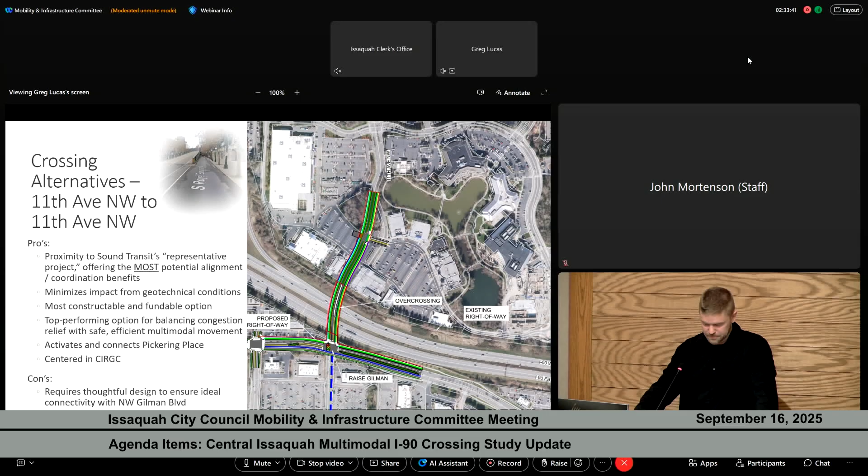All right, and the last concept to discuss tonight is the Northwest Maple Street to Lake Drive concept. This alignment begins at the signalized intersection of Northwest Maple and Northwest Gilman Boulevard, goes under I-90 and lands at the existing roundabout on Southeast 62nd Street and Lake Drive, which the initial traffic model shows it would likely need to become signalized.

To minimize the required elevation change on I-90, the structure of the roadway would dive as deeply as it can in the underlying soils and return to existing grades. The geotechnical conditions will be the ultimate constraint on how far down it could go. However, adjusting grades at I-90 is a tall task, so we want to reduce that as much as possible.

That said, the motorists will encounter pedestrian conflicts at the mini roundabout on Maple and the multiple at-grade crossings recently added at the Costco campus along Lake Drive. Balancing vehicular flow with pedestrian safety is critical. This may be too much traffic without improving the existing pedestrian crossings.

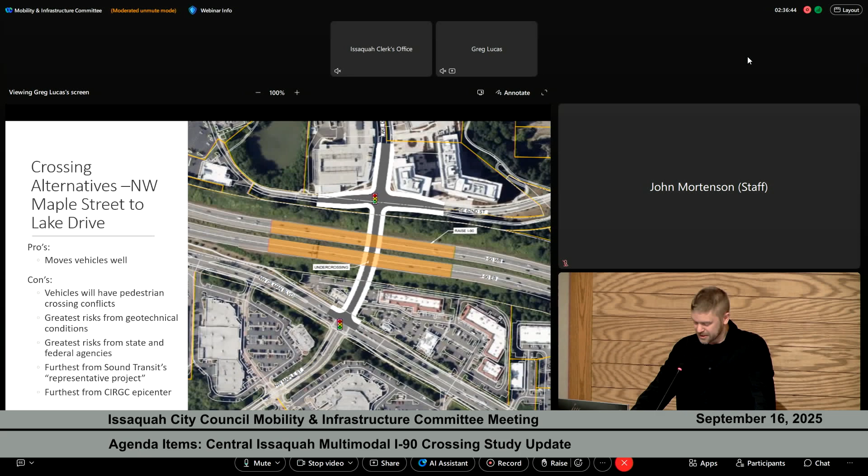It's also the furthest option from Sound Transit's representative project. Again, any extension eastward would likely mean additional funding from Sound Transit, who already faces budget constraints.

This alternative sits the greatest distance from the center of the designated growth center, reducing the potential to capture the pedestrians and non-motorized users.

So I have a question about the pros in this one. It moves vehicles well. Can you give me an order of magnitude, a ratio between alternative 2 and alternative 3? If alternative 3 moves 100 vehicles well, is there a reduction down to 65 vehicles in the second option, or is it more just a speed measure, I guess?

Yeah, I'll give you a high-level answer. It moves slightly more vehicles in the modeling, but it's not a huge noticeable difference, whether the crossings are at 12th or 11th or a couple hundred feet this way or that way. It's not a huge deal. But this one did score the best in the congestion relief category. Okay, thank you, I appreciate that.

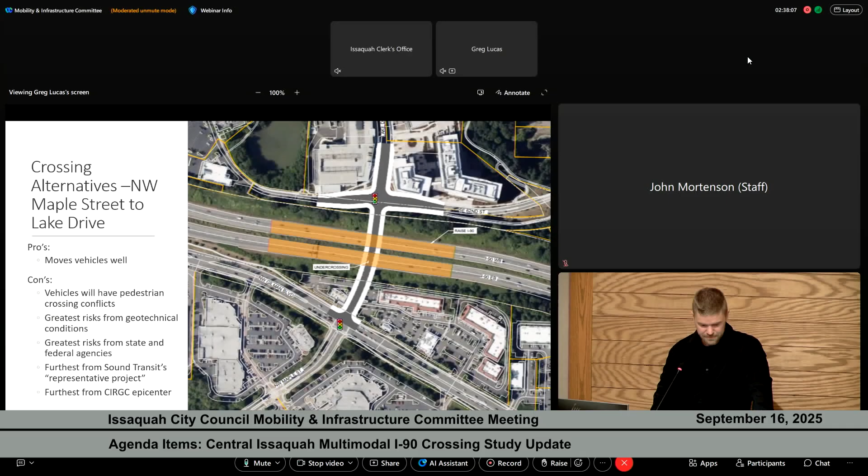All right, and so throughout the process, the team's been reviewing each alternative and giving them a score on established project goals and evaluation criteria. The 11th to 11th crossing consistently outperforms or at least closely matches all the other options in every criterion.

Notably, it's the easiest and most cost-effective to construct and deliver. It offers the most green space and climate resilience. It has the fewest critical area impacts, fewest business impacts. It offers direct alignment, which helps with non-motorist connectivity, increasing the likelihood that pedestrians and cyclists will choose it.

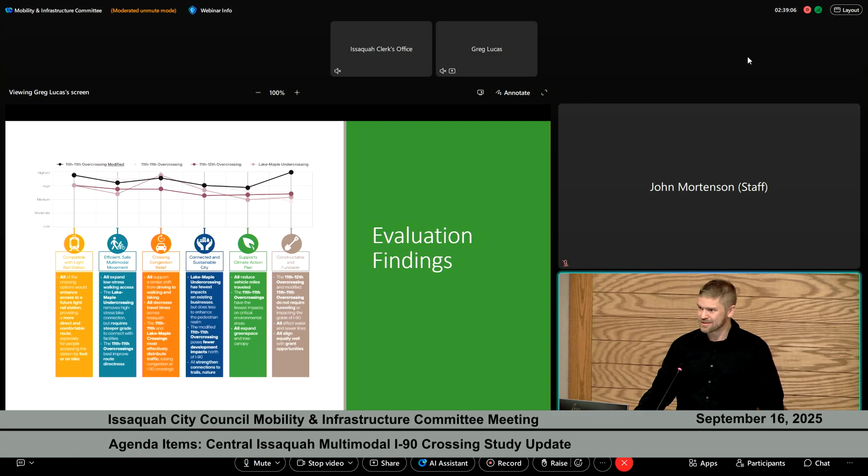That is why it is the staff's recommended option. To help visualize the crossing, the consultant has prepared some renderings and a short video. The first image shows the raised Gilman profile looking northwest. I'm happy to field any questions about these as we go through them, but I'll just let them linger for a few seconds and then move to the next one.

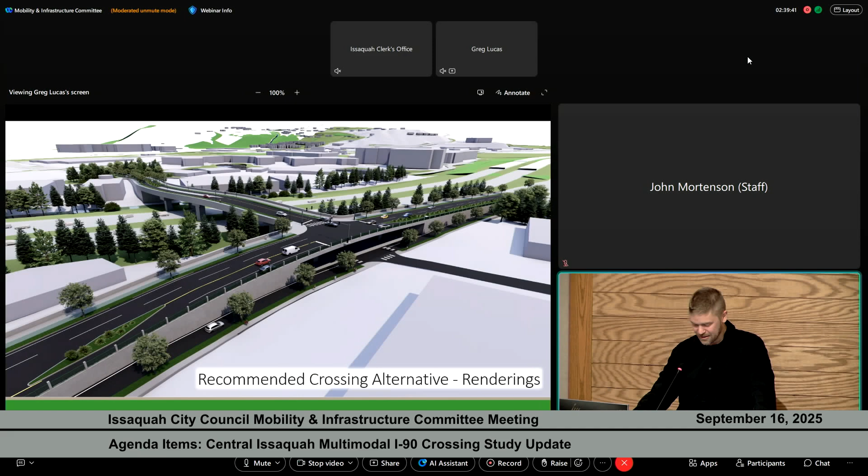You both probably have seen these before. Here's the second one, zooming into the intersection of the elevated Gilman and 11th. See the new Costco buildings in the background and the bypass lane in view, towards the bottom of the screen.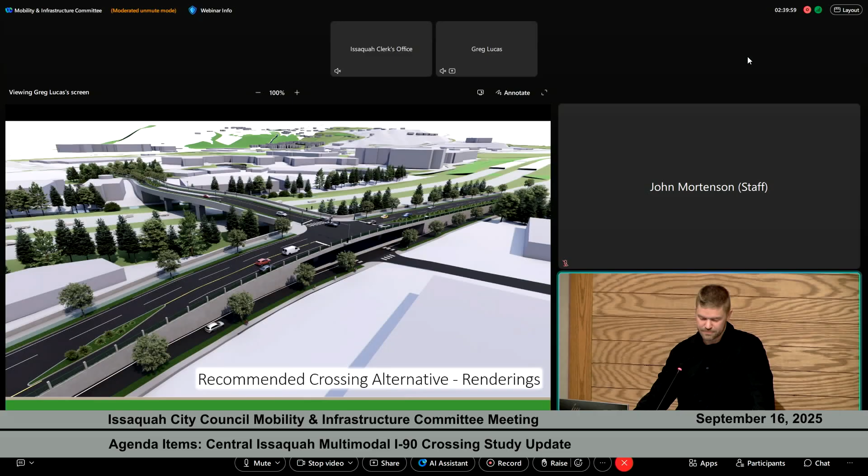Here we're showing underneath the crossing, utilizing that space as an option for the city for bike parking or any other utility. And the final rendering in the presentation offers a bird's eye perspective from the north of the freeway looking south over Pickering and near where 11th Ave Northwest ends in the parking lot.

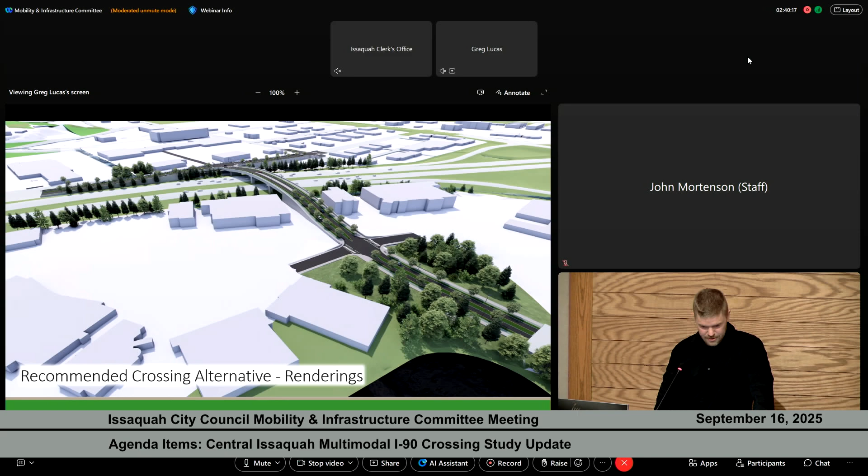This may be new, been updated, but I didn't get it embedded. This is just a short video of the rendering as well. The updates the staff added was just labels to help if this should get shared with the public. On the project website, we'll add the labels too.

That's it. So I found out that clicking on that repeatedly did not do anything. You finally give up, but that was neat, thanks. Yeah, I wasn't sure if video would work on a PowerPoint, but I'm glad it did.

Based on the study's findings, the administration recommends seeking full city council endorsement of the 11th Ave to 11th Ave Northwest crossing, starting with presenting the recommendation at the Committee of the Whole meeting later this month, followed by a formal adoption in November. Council endorsement will allow the administration to close out the consultant contract and set a clear project direction and position the project for funding opportunities as they arise.

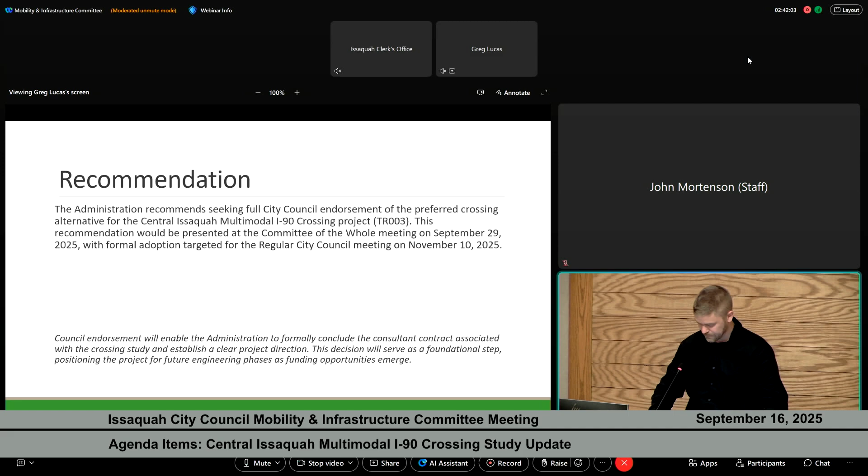If I may interject, thank you. I know that Greg is presenting that we would come from the Mobility and Infrastructure Committee to the Committee of the Whole. I'm wondering if the committee would consider going straight to a regular council meeting for council to discuss the project, allow public comment, but also potentially ask for adoption or acceptance of this preferred concept. It's rare for us to take an item to multiple committees of the council, noting that Committee of the Whole is a council committee, and the council regular meeting would still allow for the whole council to get a presentation, ask questions and discuss. Potentially if council as a whole at that regular meeting were uncomfortable or had additional information that they wanted, we could still postpone the item, have no action, and come back to another council meeting for additional discussion if that was the direction of council. So it still allows for plenty of discussion, but it would avoid going to multiple committees for council and potentially streamline the process.

I think that'd be fine. How do you feel about that? Yes, I agree, and as you say, Andrea, that would also allow the public to give us input as well. Yeah, I am actually surprised we don't have a lot more interest in this topic. This is a significant decision that we're being asked to make, and I have just been surprised that we don't have anybody joining us for these meetings, but possibly if we put it on a full council meeting, then it will get the publicity it needs.